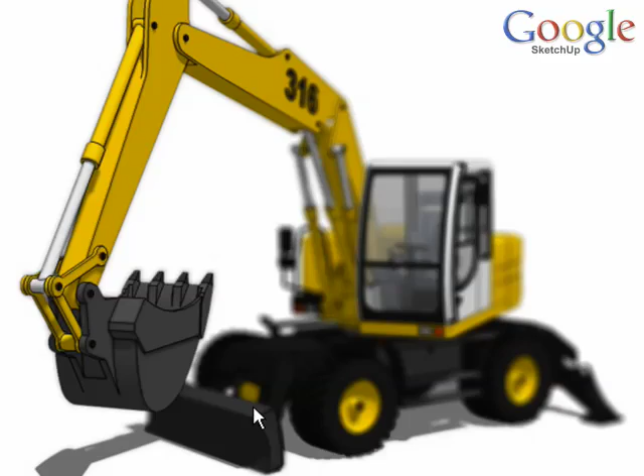You can create some really interesting effects when you combine SketchUp with an image editing program like Photoshop. And in this video, we're going to look at one of those effects. Now, I have a model here that I found in the 3D Warehouse. This was created by J-Man, who is a tremendous SketchUp modeler and an all-around great guy.

So with this model, what we're going to do is export a couple of images and combine them in an interesting way in Photoshop. Here's the images that we're going to export. We're going to combine those together to create this image where we have in-focus foreground and blurred-out background, similar to what you would get if you're using a camera, and we're simulating the depth of field of the camera. So in SketchUp, first thing we're going to do is open up our Styles dialog box.

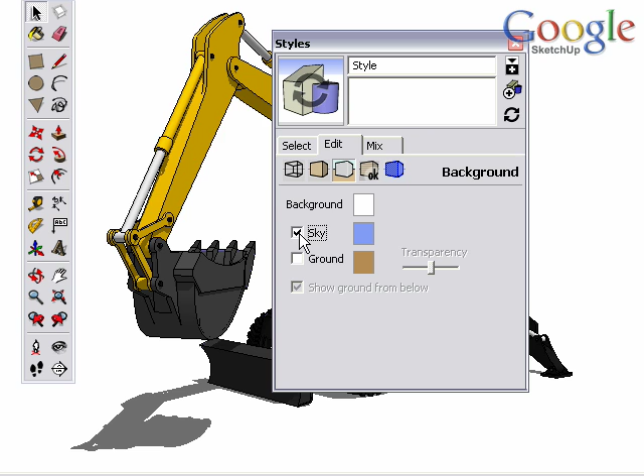Go ahead and edit your style. You might have sky turned on or background turned on. Make your background white, turn sky and ground off, and under edges, create an edge style that you like. I'm just going to turn profiles and other edge styles off. Remember that if you do this a lot, you can save these styles out, and that will help speed up your process. For our purposes, we're just going to go through and export these images.

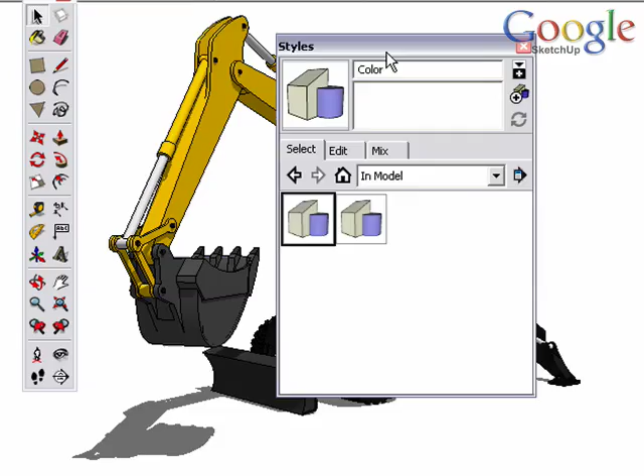So I'll go to File, Export, export this as a JPEG. Remember to change the options if you want to turn up the size of your JPEG. And there's our first image. Note that I have the shadows on. Now for the second one, I'm going to edit and turn it into a hidden line mode. So I have just the edges.

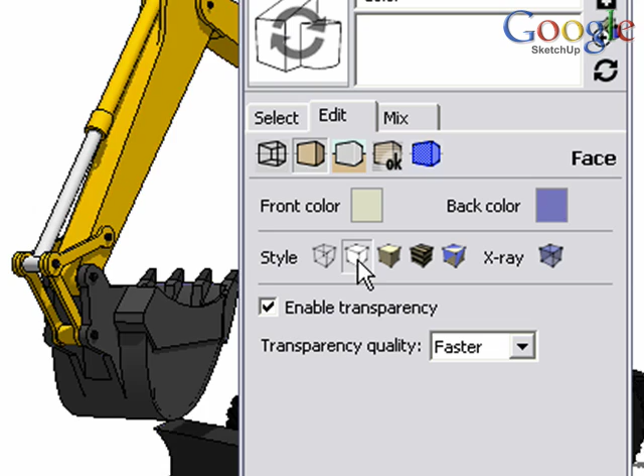Pull up my Shadows dialog box and turn the shadows off. I only want to see the edges. And there we go, we're ready to export, and we export that image out. Same settings as before. We want to make sure these images are the same size. For the third image, open your shadow settings. If you don't see the light and dark tabs, expand the window and push both of those towards the right.

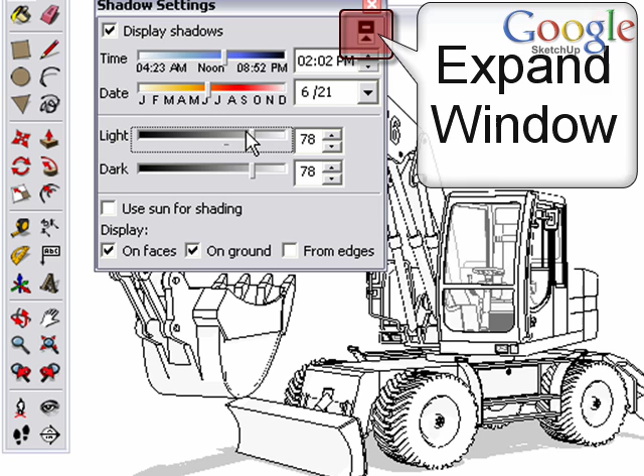Now back in Styles, under Edges, we're going to keep display edges on, but we're going to lighten them up so that they're almost purely white. Okay, here's the neat part. Open the Fog dialog box, turn the fog on. We don't see a lot of change, but under the color, uncheck Use Background Color and make the color black. Now you can see some fog effects going on. Not your typical ones, but this is going to act for us as a depth map.

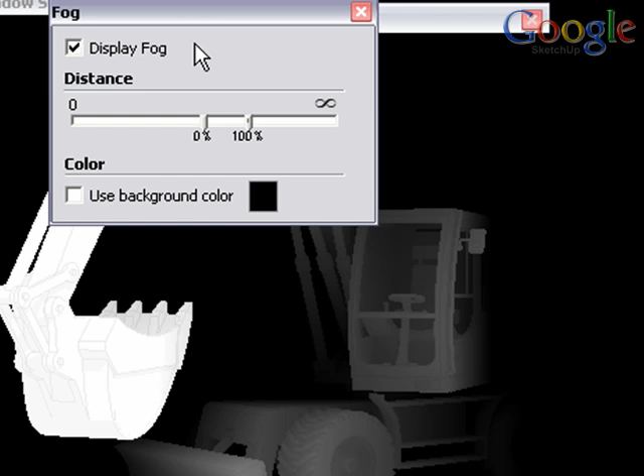We're going to move the slider so that we have the foreground in a very white and the background starts to fade out towards black. So you can see that front boom is white and the back, I'm pushing it so that some of it's even in total black, which is going to create a really good depth of field. With that ready, we export this graphic and we're ready to go to Photoshop.

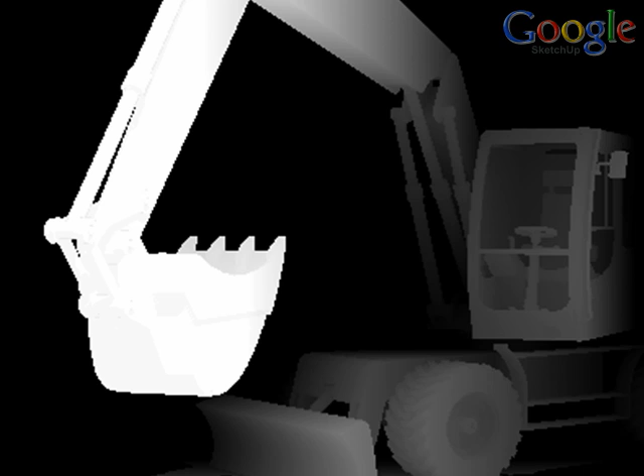One last note that some of you may have picked up on. You may have wondered why we didn't just turn the display edges off for the depth of field. This actually would be the ideal method, but sometimes SketchUp, when you try and export with these settings on, just exports the edges anyway.

So push those edges toward the white side. If you push them too far, this is what you'll get. It'll reverse and you'll have white edges on a black background. If that's the case, push your edges back to black and then push the slider back up into the mid-90s and you'll be okay. This will work fine for what we're doing.

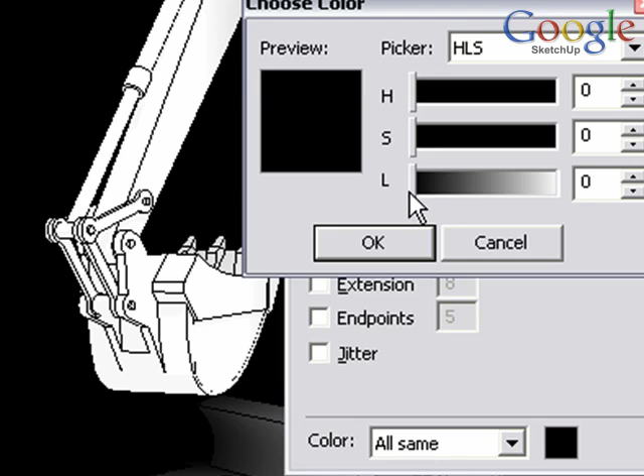Okay, here we are in Photoshop. I'm just going to drag these images in, or you can open them. I'm showing this on a PC, but of course the steps are very similar on a Mac. So we have our line image, our depth of field, and our color. The first thing that we'll look at is the layers. On the color layer, double-click on the background layer to turn it into a normal layer.

And then I'm going to add another layer. We want to fill this layer with white to act as a background for us. You can do that through the Edit menu. Fill it with white. And then drag it so it's at the bottom of the stack.

Now select the lines image that we brought in, Control A or Apple A to select everything. You can also do this through the menus if you prefer. We're going to copy that, and then in the color image we're going to paste it. Again, use the menus or Control V or Apple V.

That new line layer, change the mode to multiply, which will let us see through everything that's white, basically just showing the lines. Now we're going to come back to that later. We just wanted to put it in the stack. But now that we have it, we can close out that image.

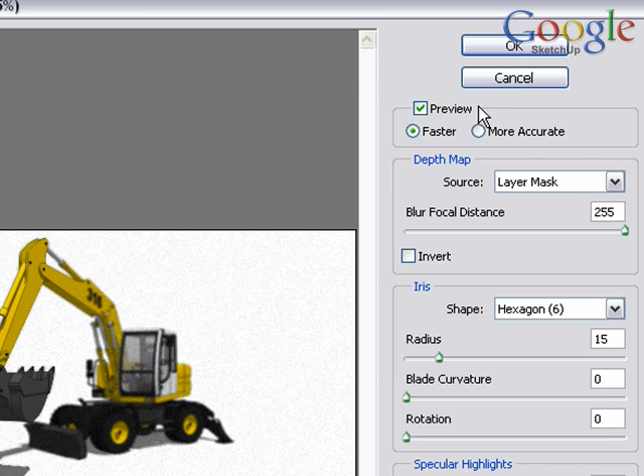Again, we turn the lines on to just get a little more of the edges, but that may not be the effect you want. So I'm going to add another layer mask to the edges, copy the depth map, and paste it into that layer mask like we did before. Again, hold the Alt or Option key, click on the layer mask to actually affect the layer mask and paste it in. This is it, the finished effect.

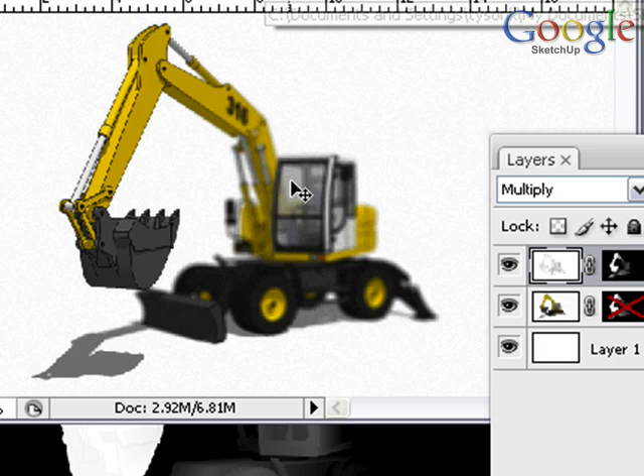One of many that you can accomplish when you combine some of the cool exporting options with SketchUp and the image editing effects in Photoshop.